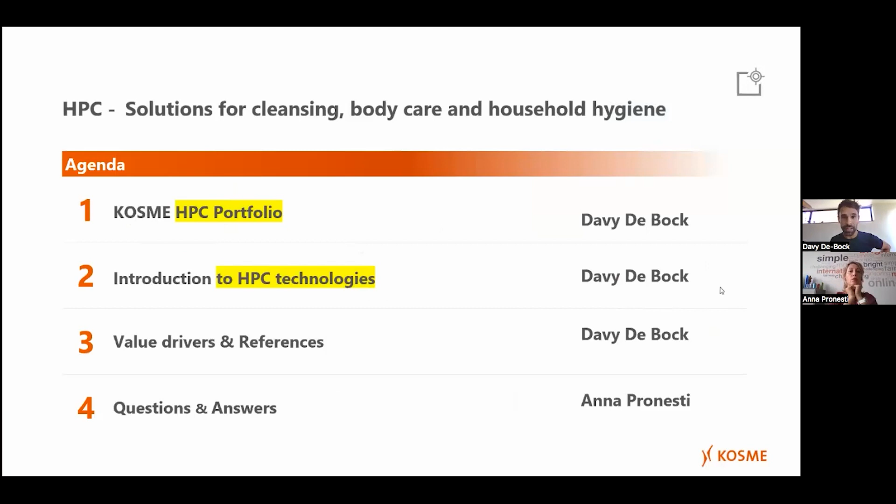So, solutions for cleansing, body care and household hygiene - house care and personal care, as we speak of. We from Kosme, under the Krones wings, are the specialists for low, medium speed lines when we speak about house care, personal care business markets.

From the production of fillers and labelers, over palletizers, depalletizers, blow molders, packaging machines and so on. Everything happens and is built in Germany, Austria, and the northern side of Italy.

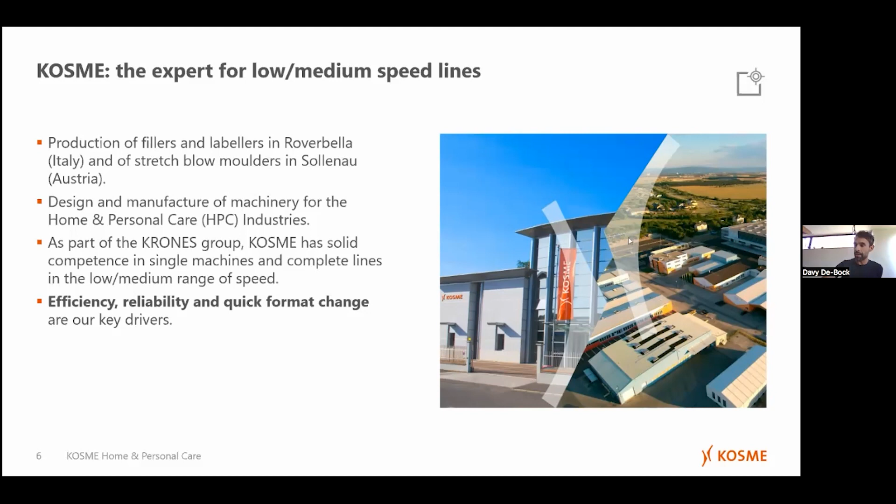As you can see here, the HQ for Kosme is in Roverbella, Italy, which is 21 kilometers away from Verona airport, where the main activities of labeling, filling and packaging happen. Then there's our other facility in Sollenau, not far from Vienna, Austria, where everything in terms of blow molding happens.

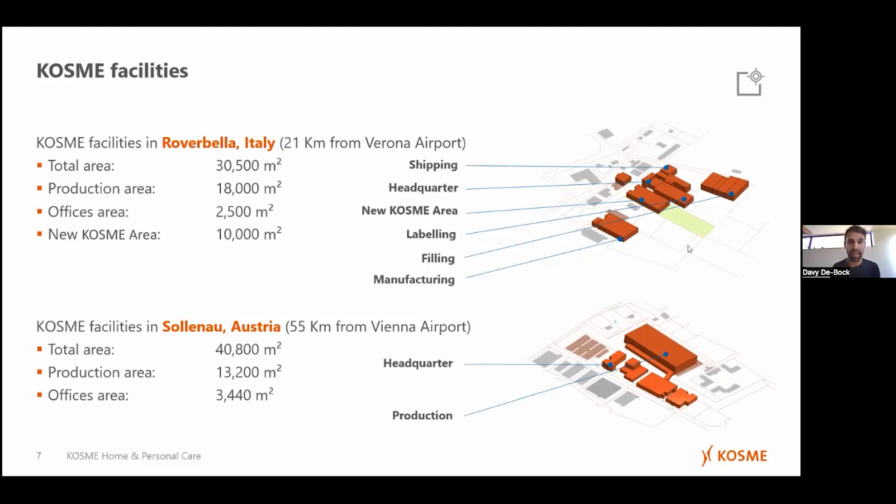The mother company Krones, on their side in Regensburg, is covering all the same technologies, but based in Germany, starting from a higher speed, starting from 20,000 bottles an hour.

When we speak about Kosme in the medium-low speed range, we're speaking about speed ranges starting from 2,500 bottles an hour up until 20,000 bottles an hour, more or less.

We're speaking about single machines or complete lines. Those single machines or complete lines are designed with an eye on flexibility, with an eye on different kinds of shapes of bottles, products, and with a high quality output.

No matter the shape, the cap, the label, or the product inside, as you can see on the screen with all the different examples.

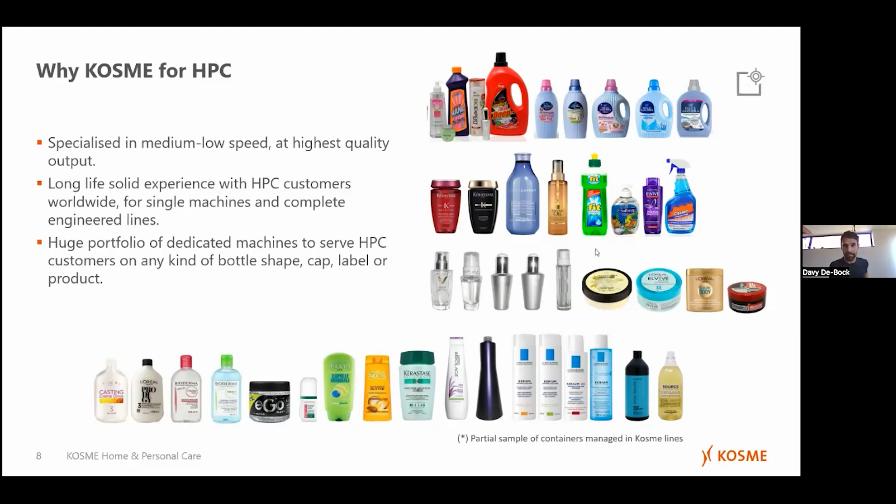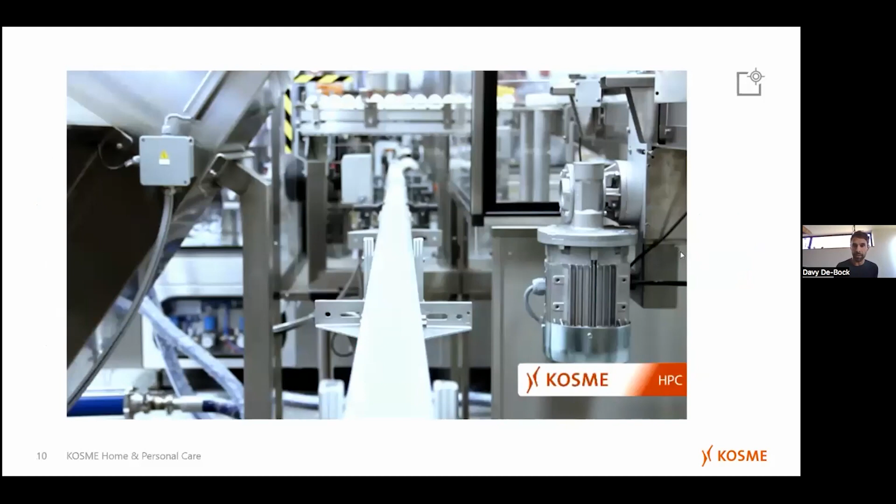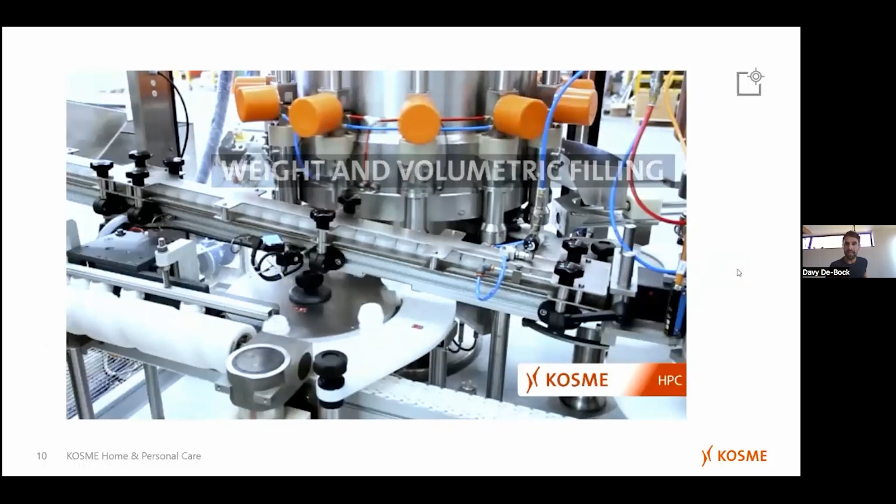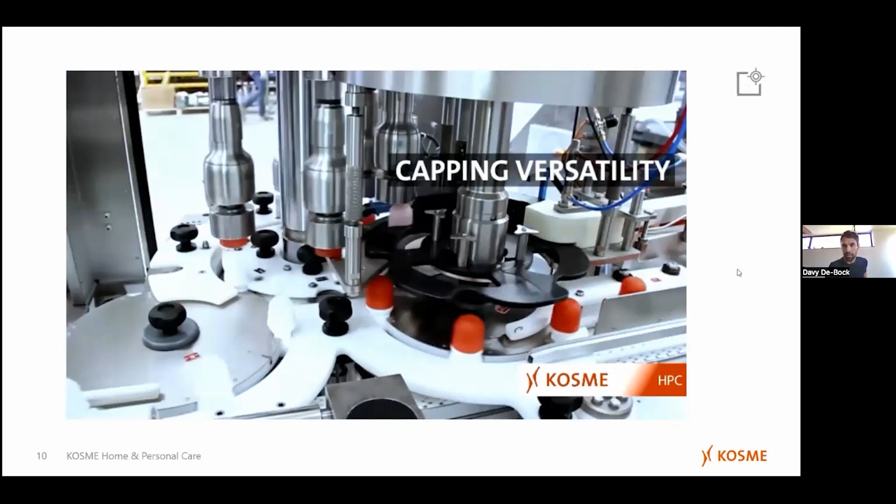We're going into a video first to quickly show you what we are capable of doing and what we're speaking about. So as you can see right now, we're speaking about a filler which is filling a quite common bottle, a deo bottle with a roll-on stick. It's a quite common thing, but it's not so easy to apply.

We're seeing the dispenser pump capping, which is quite common in the house care, personal care world, but not that easy to apply as well. Regular push-on caps, twist-off caps, all different sizes of caps.

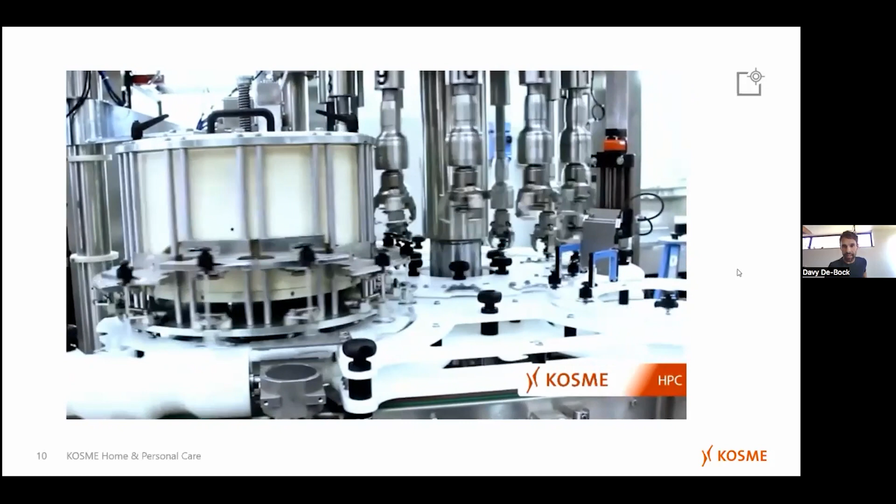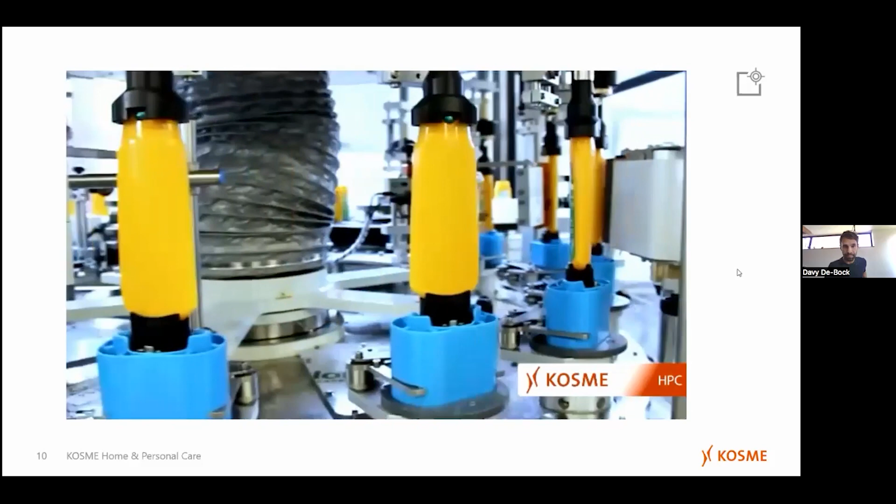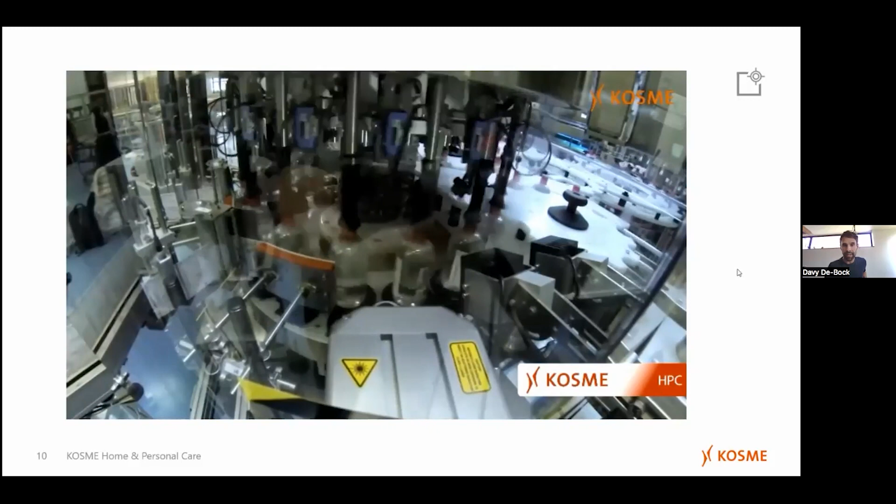Same goes for labeling. We're seeing an easy top-on labeling as well as a front and back self-adhesive label application, with orientation of gripping the bottle into the correct position before and after labeling, tandem labeling, quality control during the labeling, and complete block solutions.

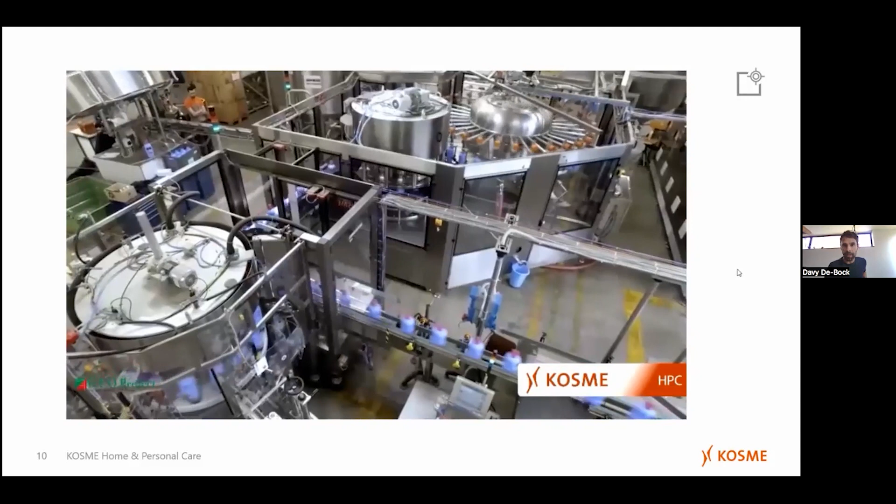And just showing off how fast those things go and how they look from a top view, which is always quite interesting to see.

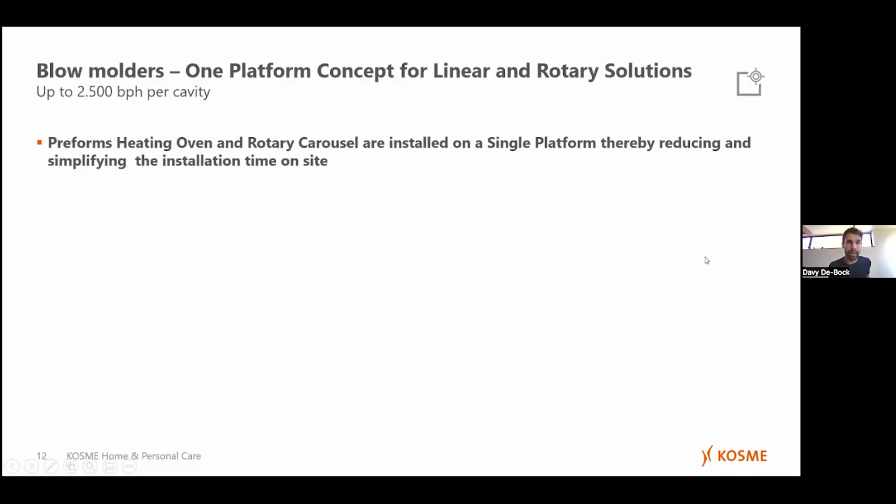If we go deep into the machine portfolio, starting with the blow molders, you can take as baseline that each cavity of every machine is capable of running up to 2,500 bottles per cavity. We have solutions for linear machines for big bottles, up to 30 liters, or really small bottles down to 0.05 liters. Everything depends on the size of the bottle and the output speed you want to achieve.

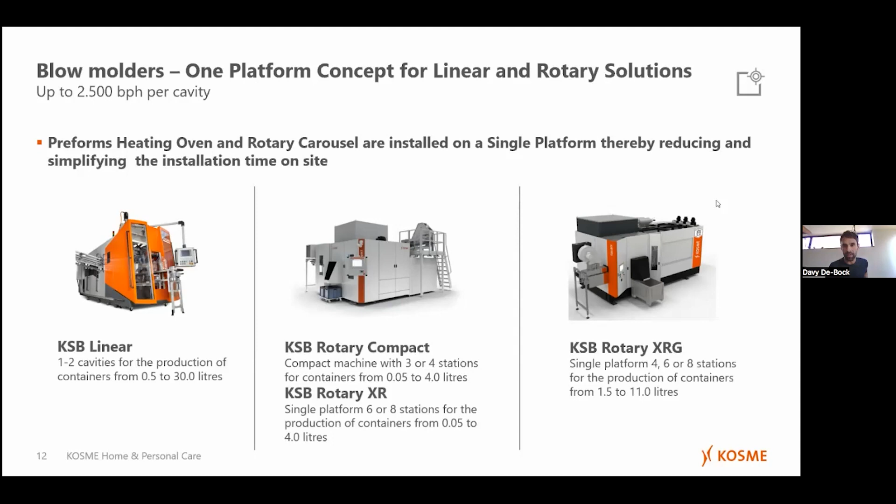If you want low speed with bigger bottles, it's most appropriate to go for inline blow molding, linear machines. Where you want high speeds with volumes up to 4 liters or 11 liters, it makes sense to go for rotary machines. Rotary machines can be in compact executions, or with preferential heating. So in terms of novelties, everything is possible to implement.

As I just mentioned, preferential heating is quite important, especially in the house care and personal care market, other than the beverage market where we speak about cylindrical bottles. In house care and personal care, as you can see in the images, the bottles are quite atypically shaped, which requires a specific type of heating and a specific way of handling the preform before blowing it.

With our preferential heating installed in our blow molding machines, we have the possibility to blow and achieve the quality output which is requested by the customer. So you could say the sky is almost the limit.

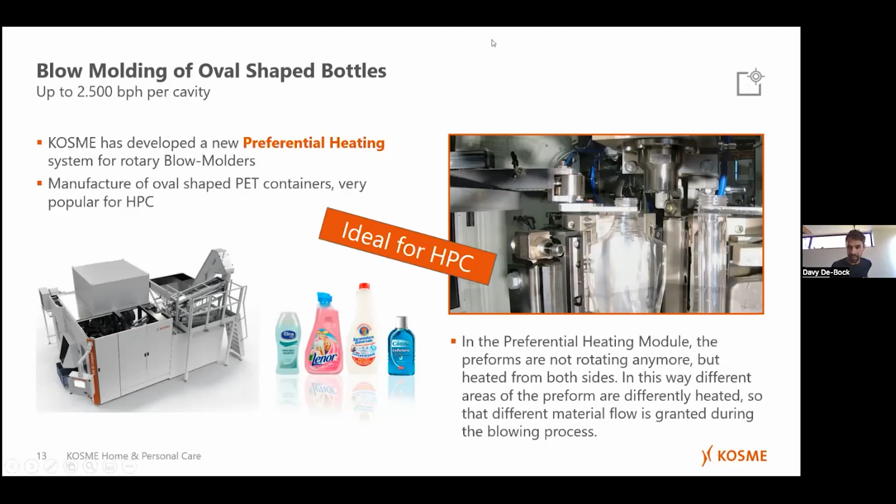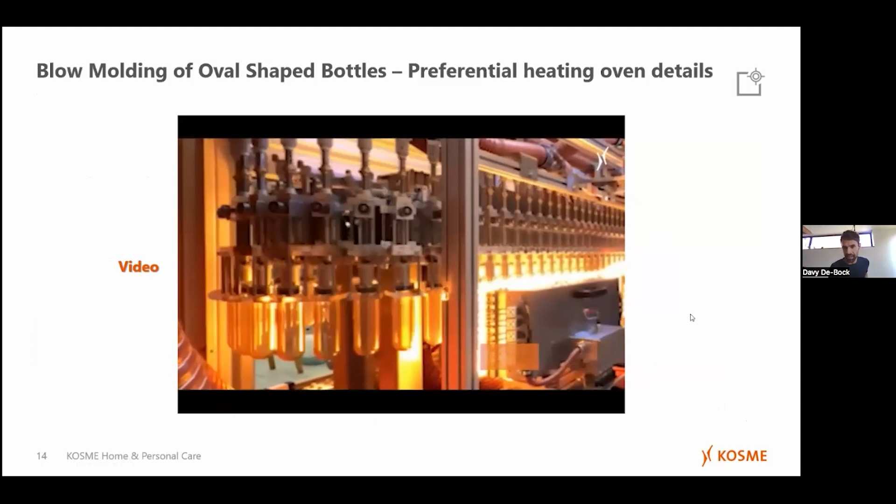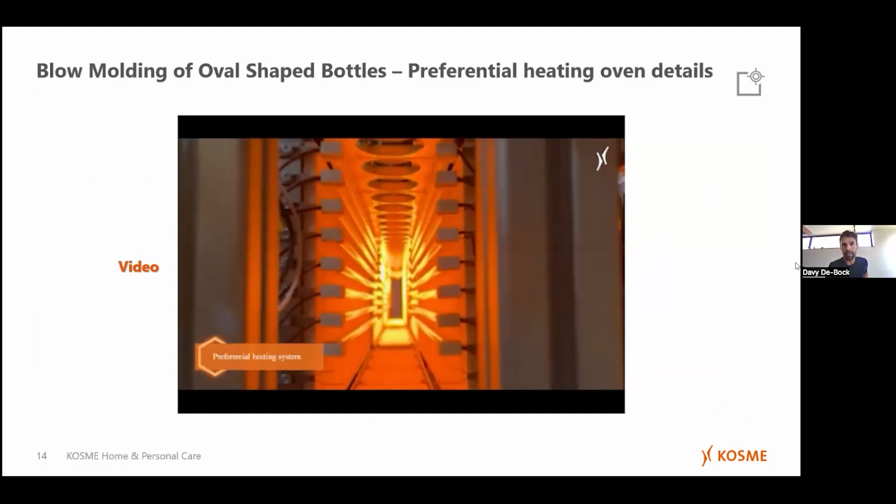Here's another video to explain some things. You can see the preforms going into the oven, where they're heated on different sections. When you see the lines there, here we go, we can decide whether we heat it more or less on a certain area of the preform before it goes out into the mold to be blown.

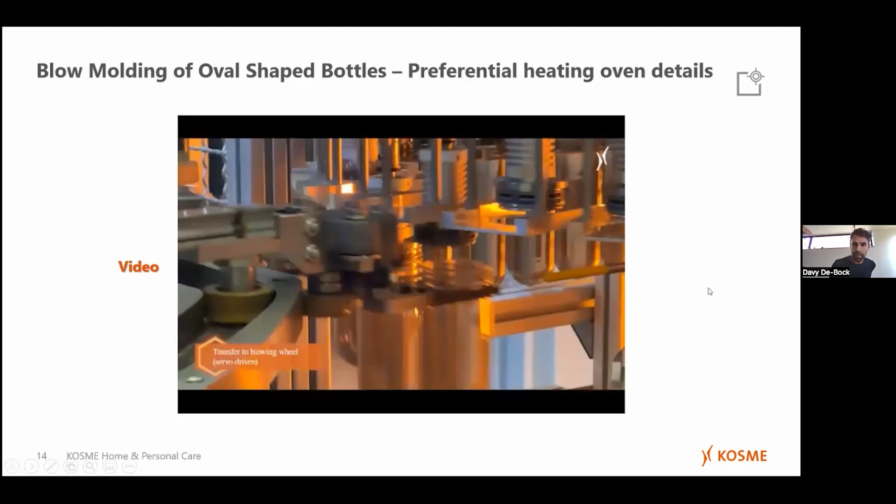When the preforms are blown, by the way, due to air recovery, we're reducing the consumption of air. So with non-stop production of blowing bottles, we're always recovering the air that escapes while a preform is blown to use it for blowing the next preform, which is a big advantage in terms of consumption data.

When we go from blow molding into filling, when we speak about house care and personal care, we're most often speaking about weight fill or volume fill.

Weight fill is the most ideal, or most covering, solution in terms of filling, as you can fill both very viscous products or very foamy products due to the pressure you can put on the tank before going in. Which is really important, and a big advantage of weight fill is that you have the combination of both products you can handle.

On the other hand, you have a high precision, a really high precision in terms of filling your product, which means no spilling of product left or right, and an exact output of what's going in and what's going out in the final bottle. There's also the possibility of two-stage filling with fine and gross flow, which gives you perfect control.

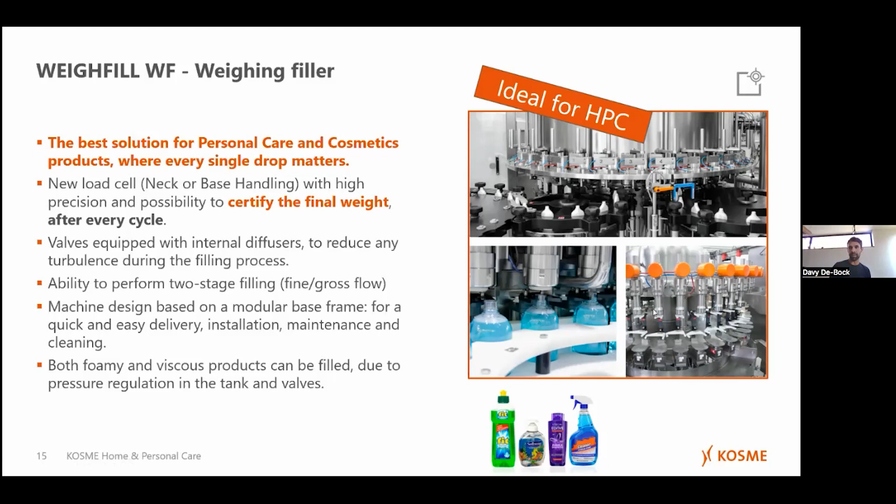After every cycle, by the way, every load cell indicates the exact output on the screen, so you have perfect control. You could say Big Brother is watching the complete machine and every bottle that's coming in and going out.

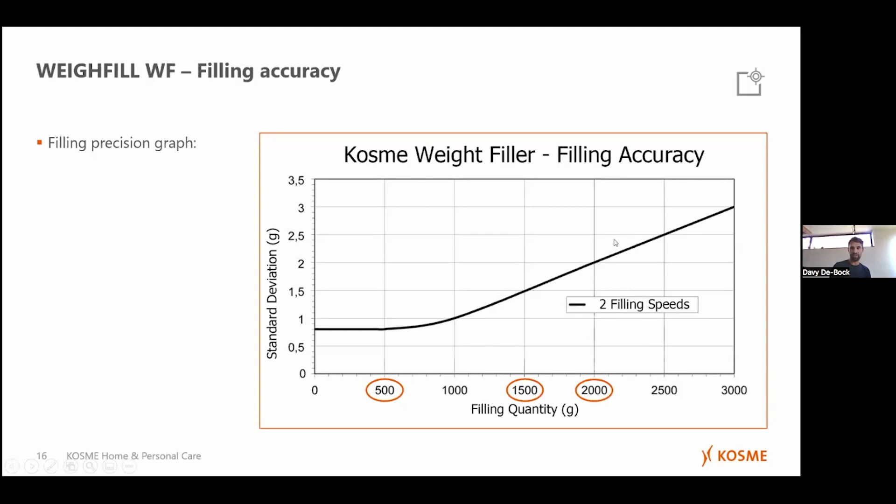As I mentioned, for filling accuracy, on 1 kilo of product, so 1,000 grams, there's a standard deviation of 1 gram, which gives pretty impressive numbers to work around. And keep in mind, this is theory. When we're doing our filling tests in our lab in Italy, we're even achieving better results. Just for your information.

Another big advantage that we came up with a couple of years ago, based on our experience in the market, is the low-flow cleaning inside the tank, as you can see here. Often you have a lot of issues cleaning products, as they're always on an oily base and very viscous in the tank. With these spray balls, you get 360-degree coverage for machine cleaning, which reduces it to a pretty simple job and a perfectly 100% controlled job, which is a really big advantage, especially when you're changing formats or products on a regular basis.

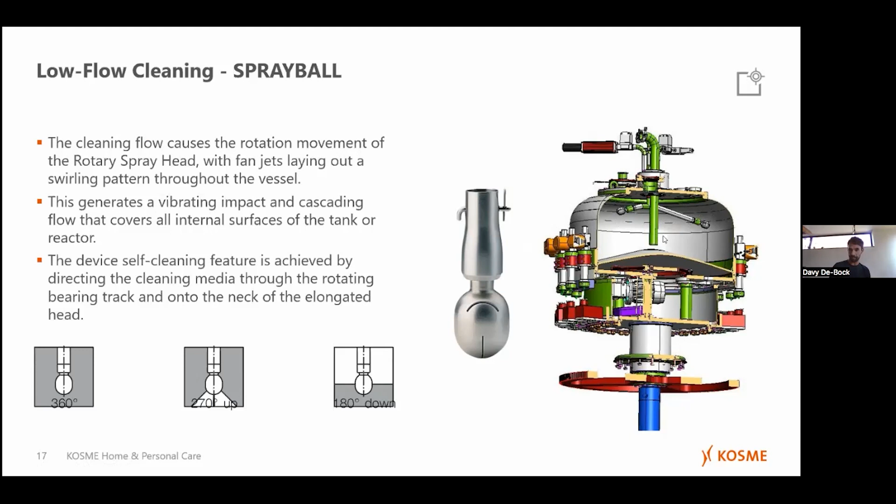The other filling technology I spoke about was volume filling. Volume filling is limited up to 30,000 bottles an hour, which is quite high for the house care and personal care market we're speaking about. This is just to give you an indication of the combination of valves on a carousel diameter we can offer.

The most important thing about this volume fill is that we're working without a tank. So it's a tankless solution, which makes it very easy to clean. A small disadvantage of this volume fill is that it's more difficult to work with viscous products, although we have mass flow meters to push the low conductivity products outside.

It's not the preferred solution when there's a wide range of products you want to fill. Filling precision is also pretty high, as we'll see in the next slide. Another strong point is that there's no air return nor contact filling, so there are no filling pipes inside the bottle. And of course it's CIP capable—again a tankless solution with a closed CIP channel and automatic CIP cups, which makes it pretty easy and attractive to do a CIP during a format changeover for a complete line, since you don't need an operator standing next to it.

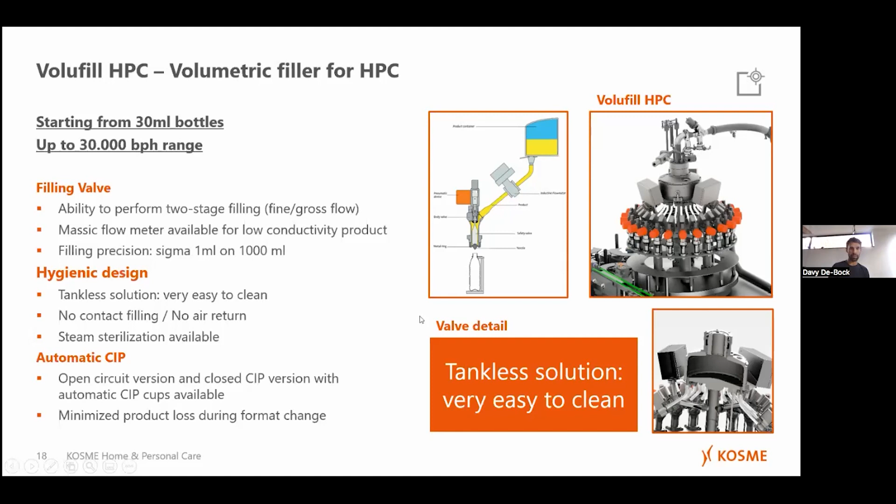Here we see the filling graph, the accuracy, where you'll see a slightly higher number than with the weight fill. So to summarize, the weight fill is the most perfect machine, both in terms of accuracy and when speaking about a wide range of products, from high viscosity to high foam. The volume fill, on the other hand, is a more simple, more basic machine, specially concentrated on more foamy products and viscosity up to a certain level. So it's all again a matter, as I mentioned at the beginning of the presentation, a matter of DNA and the exact products that the customer wants to produce and bring to market.

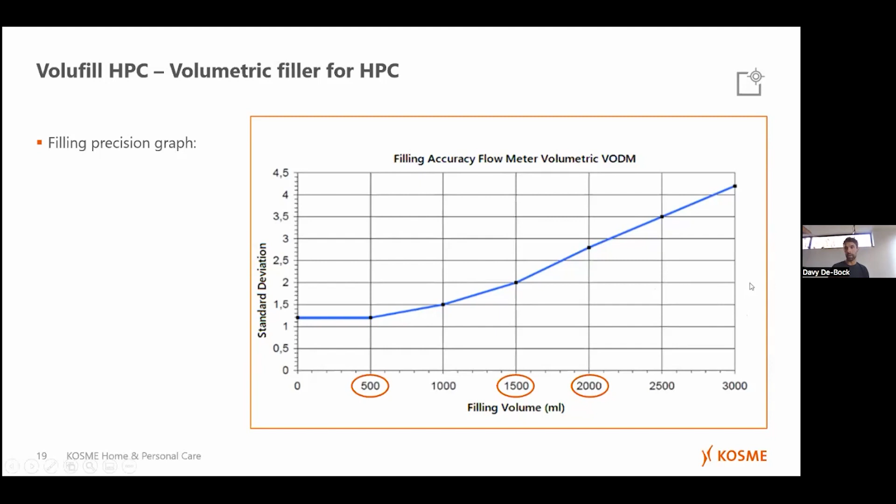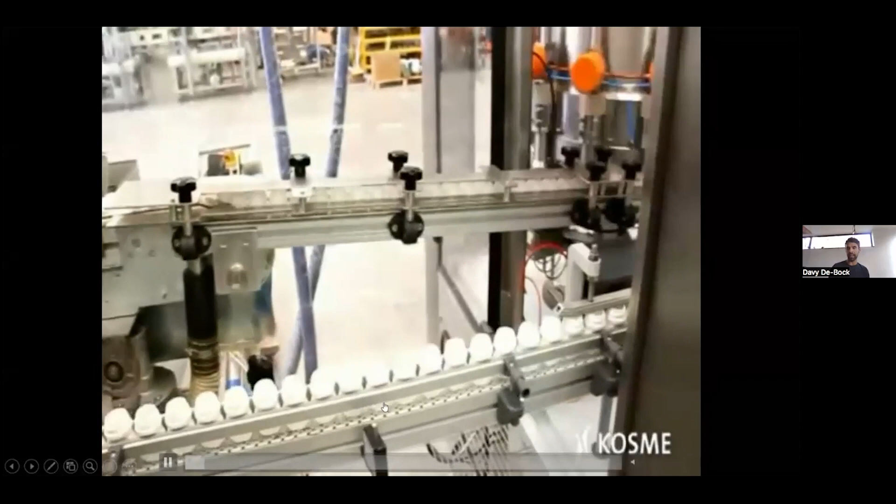This is a machine we saw in the beginning. We slide it in because, again, this looks like a pretty easy and common bottle on the market, although it's not so easy to have those bottles filled and capped, especially capped. I want to put high focus on the filling—as you can see here, there's no filling nozzle or filling valve going into the bottle.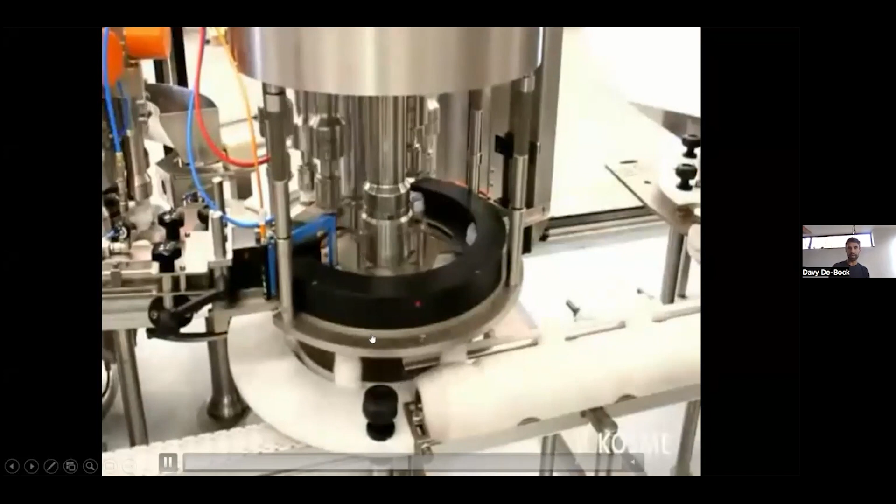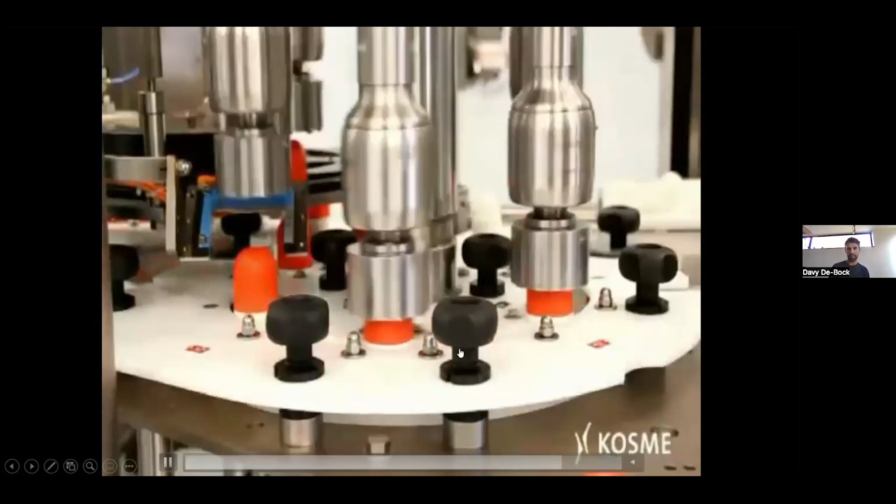And then during the capping, which is a Kosme capper—all our cappers are built in-house as well—the balls are pushed inside the bottle. All ranges are possible here, all different diameters are possible, so now we have the pre-sorter. It looks quite simple, but it's quite an impressive thing.

Another important thing when we speak about house care products is that these machines need to be capable of working with corrosive products. Depending on the solution and the product the customer wants to fill, we have the possibility to design our machines with the right covering and the right parts, and with the appropriate standards a company needs to work with—going from titanium to PVC, PP, or Halar, everything is possible. There are a lot of examples and references across the globe. It's just a matter of correctly understanding the scope of the customer and the design of our machines. That's really an important one as well.

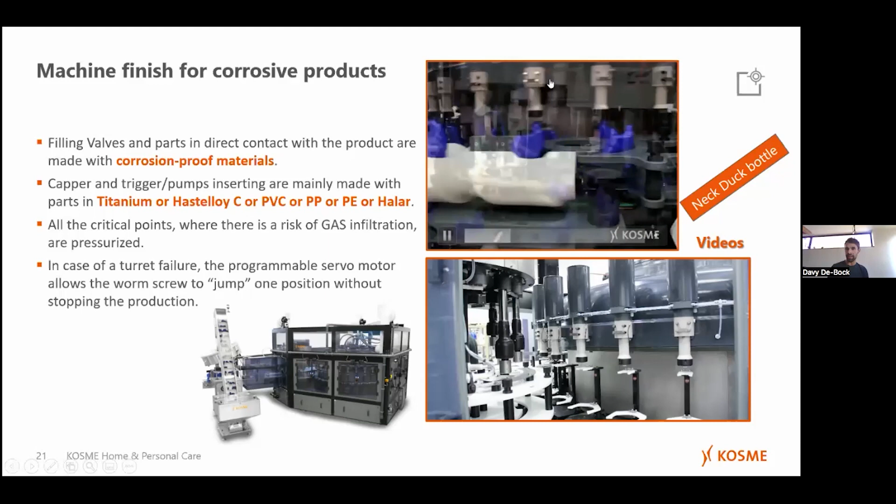But again, the biggest focus here is on how all the parts which can come in contact with the product are treated anti-corrosive, and then the bottles are tilted again to the correct position before going out. Here you can see a close-up picture of that.

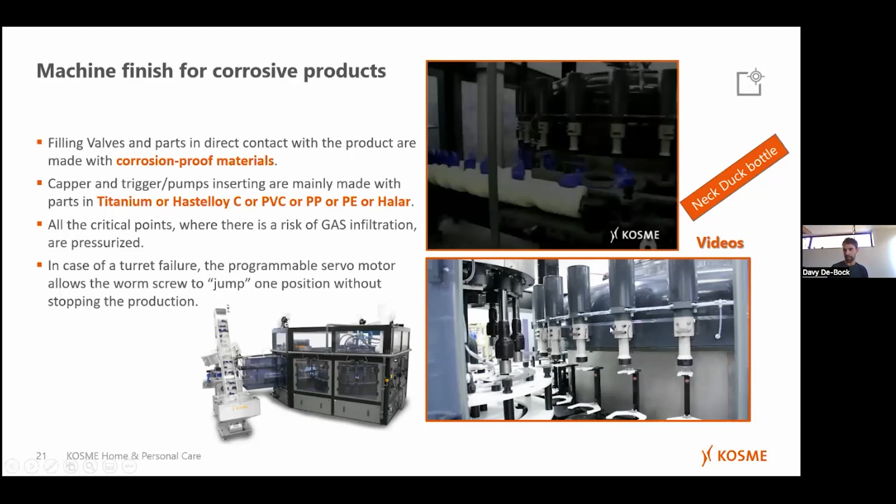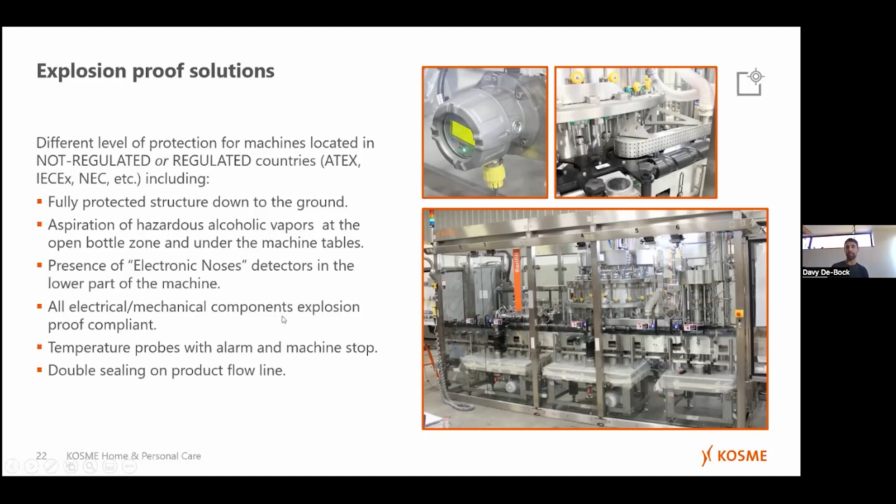When we're speaking about dangerous or aggressive products, we're also speaking about explosive situations, as with ATEX, as most people will know. Sometimes we need to fill products which are highly explosive, where there's a risk of explosion. We design our machines to respect the ATEX rules of the destination country, based on aspirating the air or vapors coming out through our connection points, electronic noses detectors installed underneath the machines, how the complete machine is based in a pressured zone, and how it's covered. The machine still looks the same, as you can see with the rinser, capper, filler here, but everything is really ATEX. It's an important aspect in the domain of house care products.

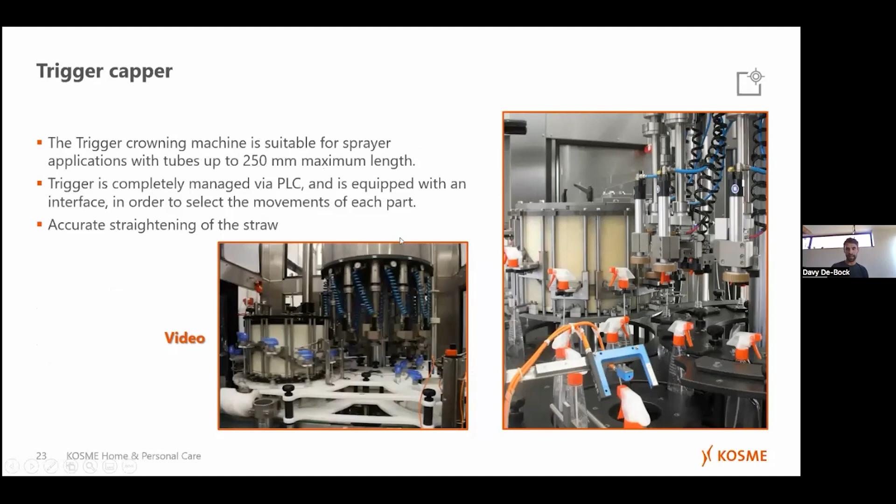Then we're going to the cappers. We saw before in the video the way of capping roll-on caps, and a little sneak peek of this trigger capper. This one is a Kosme capper we designed a couple of years ago, covering trigger cappers and pump cappers, which we see often in house care products. An important topic here is that we can handle both caps capable of rotating afterwards, or triggers that need to be oriented in one certain direction. So both ways are possible.

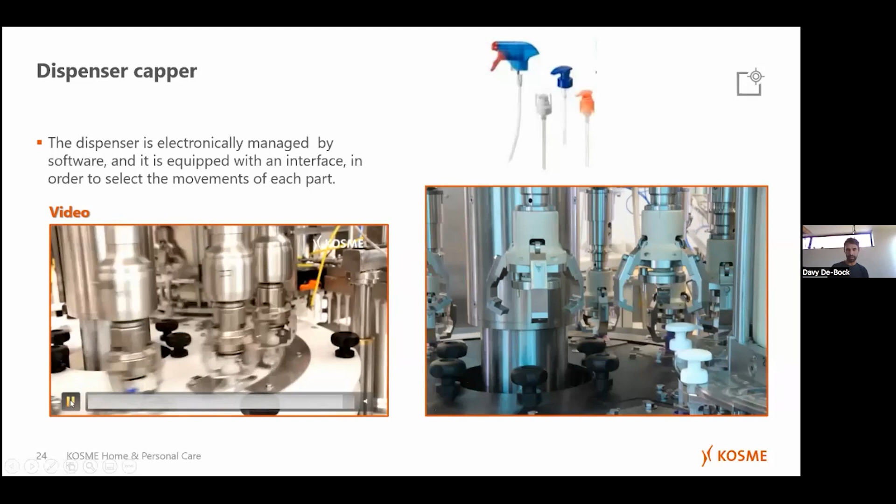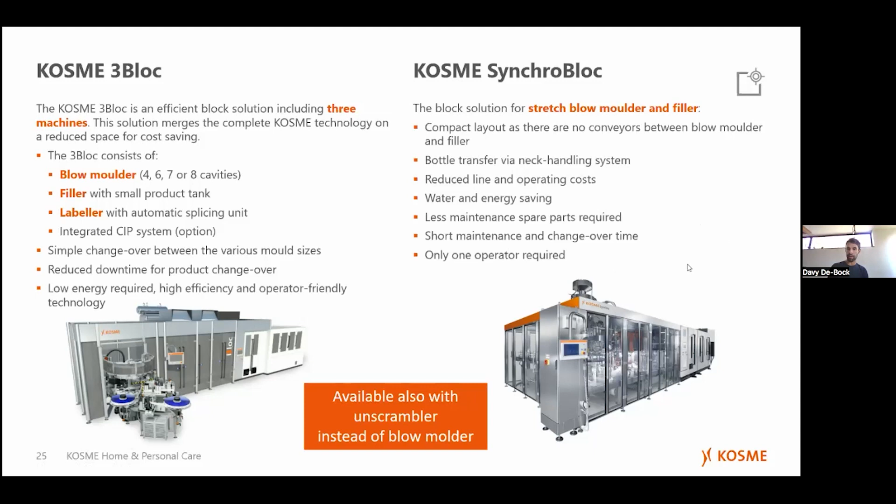On the other hand, we have the SynchroBloc, where a stretch blow molder and a filler are combined and connected to each other. Again, there's a big advantage of having the filler directly connected to the stretch blow molder. Labeling can happen afterwards. There's also the possibility to connect it to the unscrambler instead of a blow molder, but it all depends on the scope of the customer.

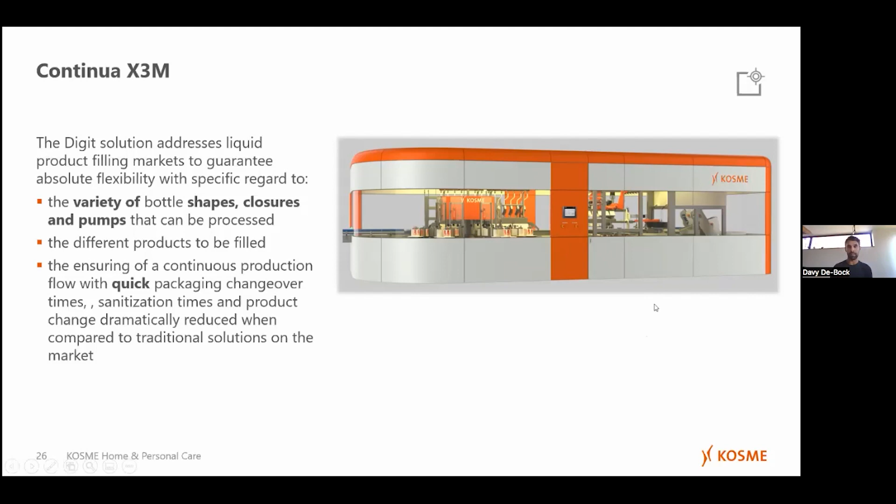And then we're going to the X3M machine. After this presentation, I will show you a small video which explains the advantage of this X3M machine. The point is that we created a concept where we want to fill, cap, and label any type of bottle, any type of product, any type of cap without stopping the machine. That's really the idea - a non-stop running solution, at a maximum speed of 6,000 bottles an hour. One advantage is no downtime anymore, and the other big advantage is a reduced floor space.

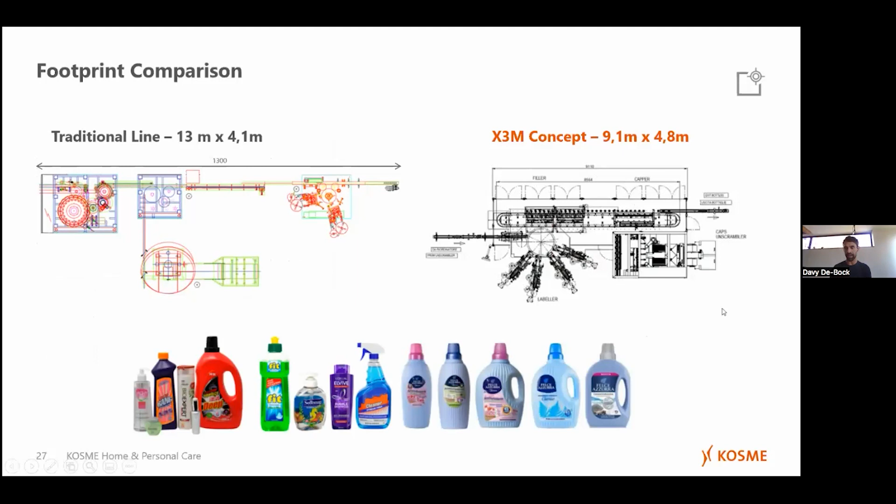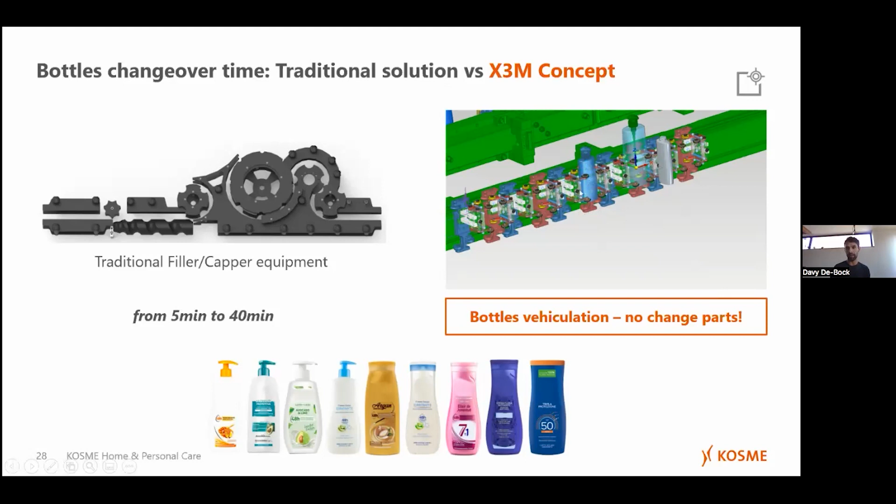We're coming close to the video at the end of the presentation, and then I'll go into detail about how it looks. Some important features: changeover time will be reduced or will even disappear, as we're working with dedicated grippers through linear B&R motors instead of the classical setup. The same goes for the cappers, where we're working with different capping heads to handle all types of caps, as you can see here.

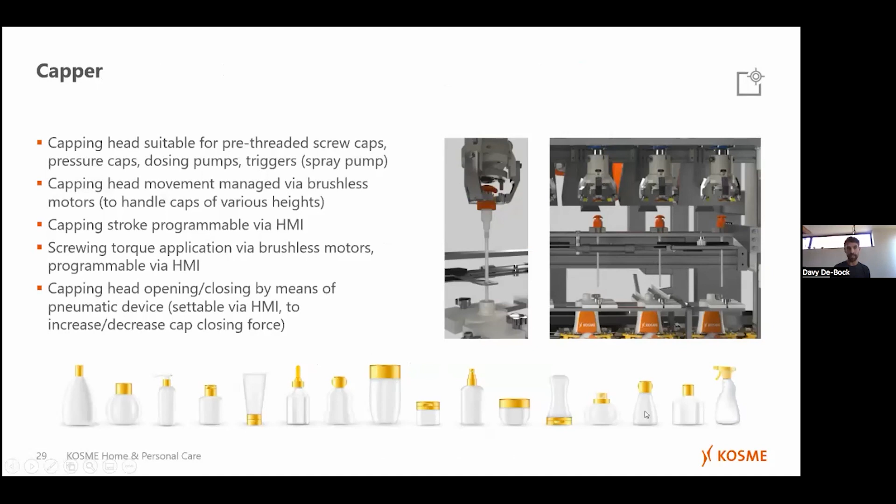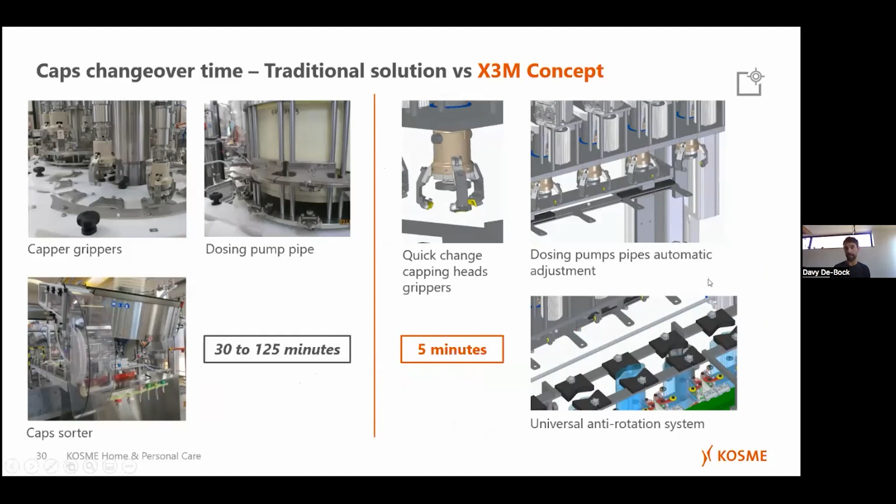And where there was a changeover time from 30 to 125 minutes, we're now reducing it to 5 minutes or even 0 if we're staying in the same range of rotating caps. And then we're going with the double cap elevator lift system in order to run non-stop without changing the caps, without having the need to run dry, let's say, and then a cap elevator.

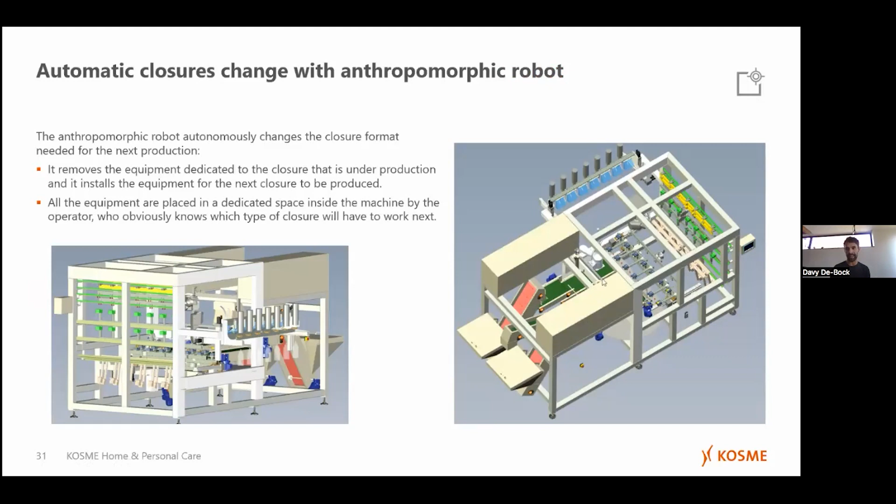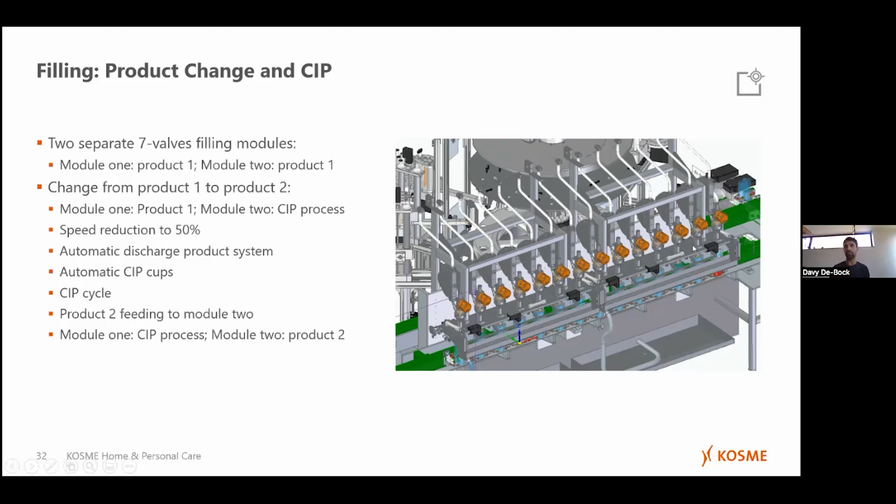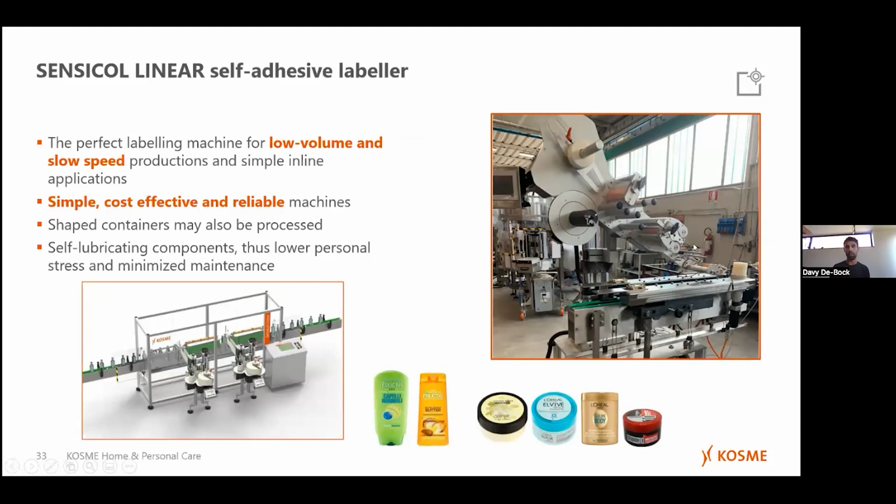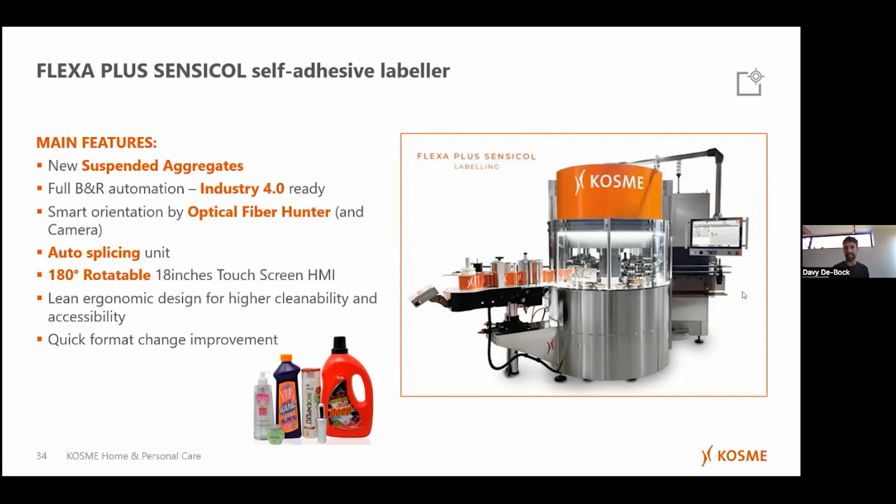Then we're going to the labeling, quite common and quite known technology. Whether we do the self-adhesive labeling on top, on the side, or in a rotating way, everything is really possible here as well, again with speeds up to 20,000 bottles an hour. After that, we're going through our mother company, Krones, which is capable of handling labels at much higher speed. Important here is to understand that we're having the non-stop solutions, the orientation, the quality controls, and the easily accessible machines always as a baseline, let's say, of our machine designs.

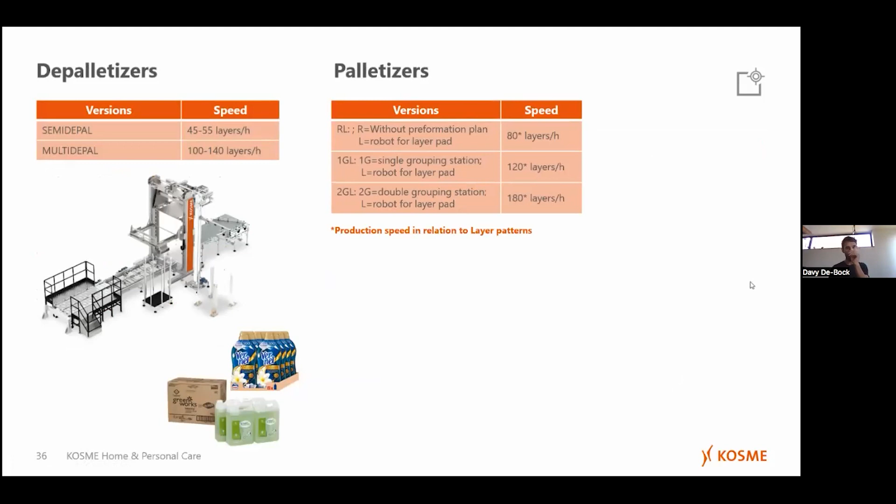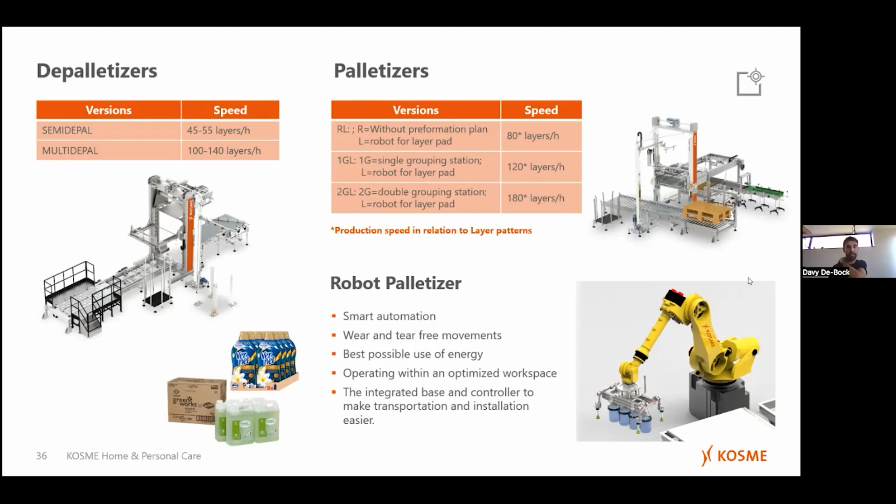I'm going a little bit faster here as we're running a little bit behind time. Again, we're having the depalletizers and the palletizers as well, both with robot palletizing, whether it's needed or not. Everything is dependent on the speed, the floor space we have available, and the type of packs we need to palletize or depalletize. And then we're going to the engineering and the line competence.

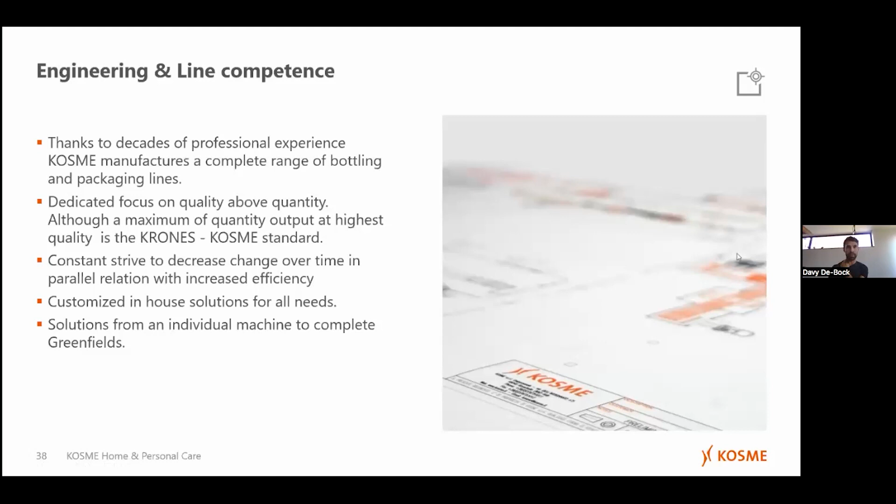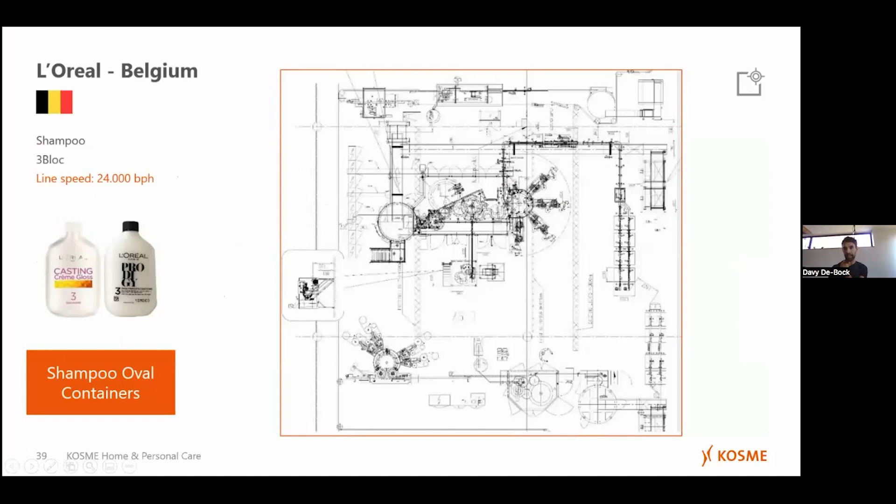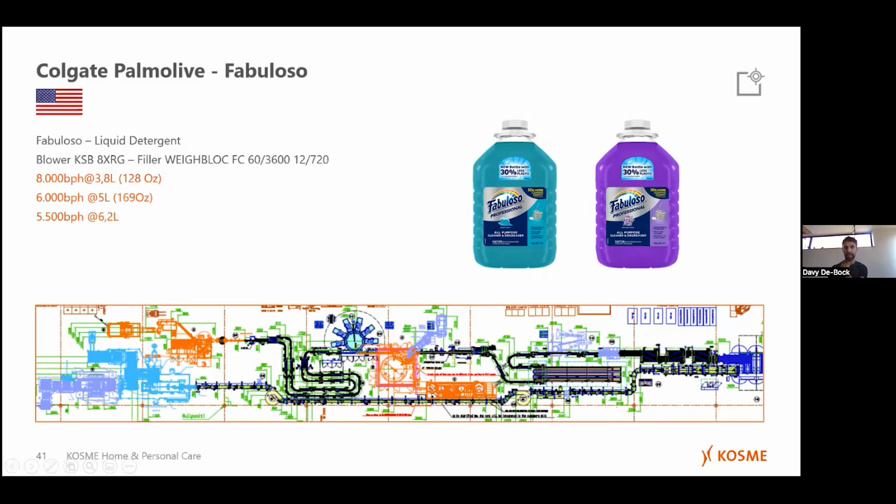As I mentioned to you before, we're doing the single machines or the complete lines. As you can see here, an example where we're having a synchro block with the filling and the capping and the labeling in one block design for a pretty small bottle, which was quite challenging. We could do the bigger lines as well for the bigger blocks when we're speaking about 5 liter, 6.2 liter bottles, complete lines where we have the blowing, filling, labeling. This was a project in the United States.

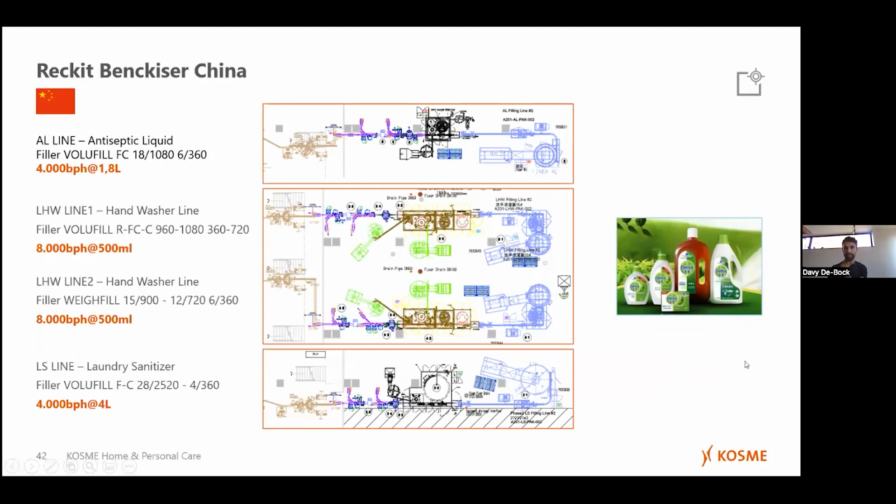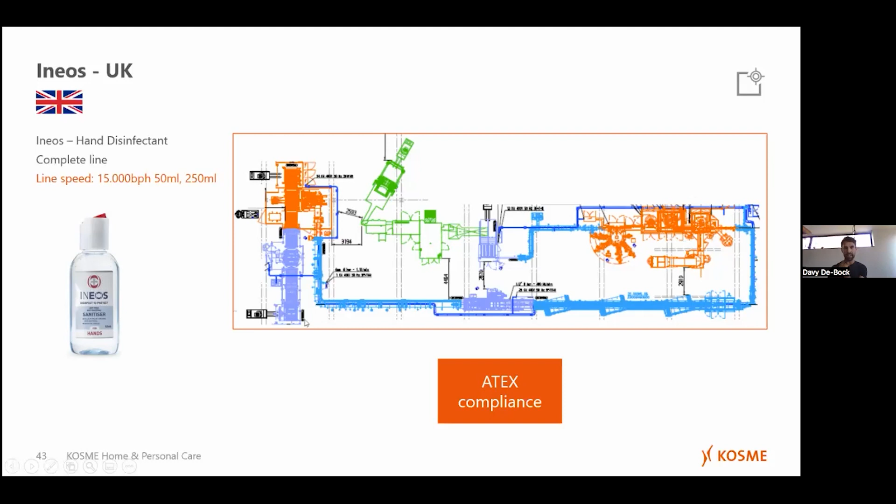Another recent project we did for Reckitt Benckiser in China, where we had lines for laundry sanitizer, hand wash, so both weight fill and volume fill, 8,000 bottles an hour, 4,000 bottles an hour. Again, for Ineos in the UK, a line speed of 15,000 bottles an hour, where we worked with a labeler connected to filler-cappers, completely ATEX, so the explosion-proof solution, for a hand sanitizer, COVID, if it rings a bell.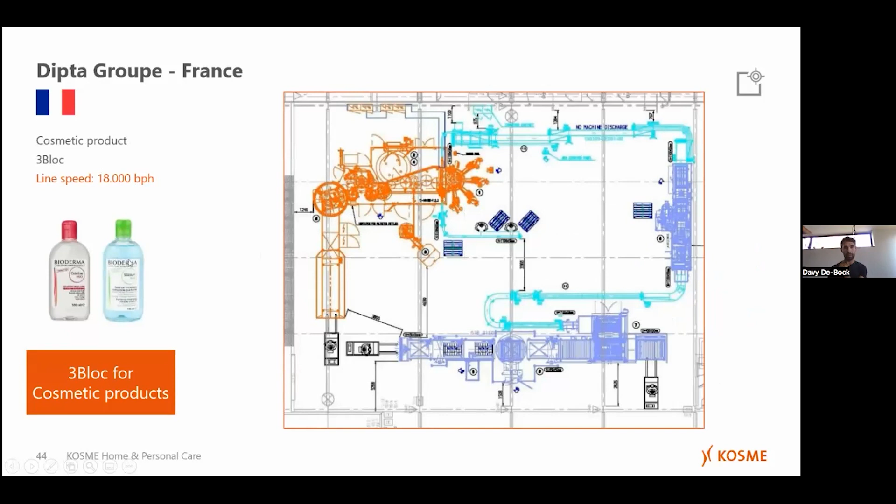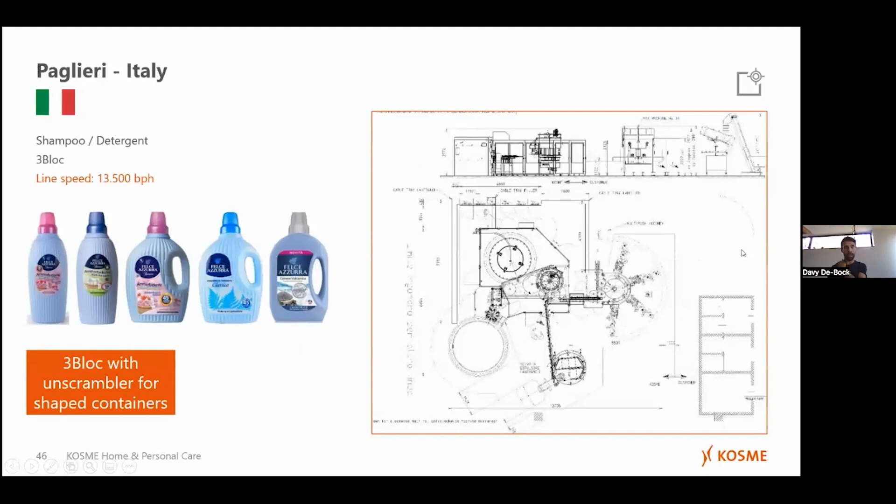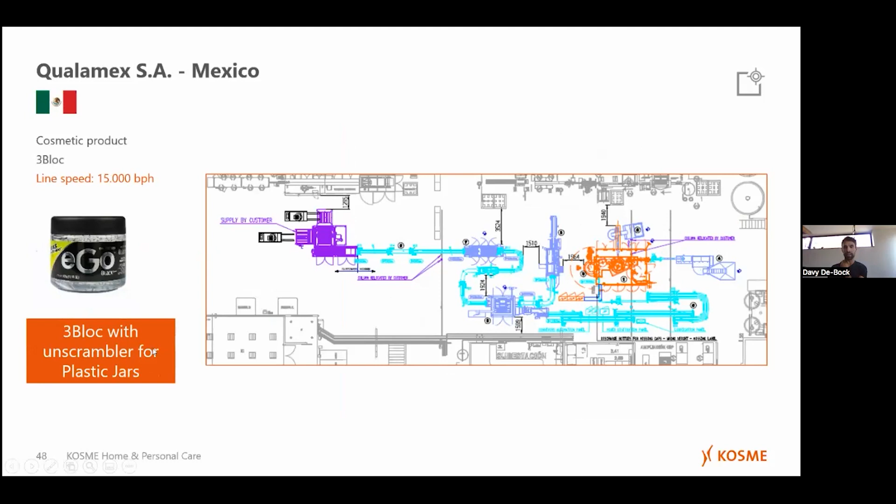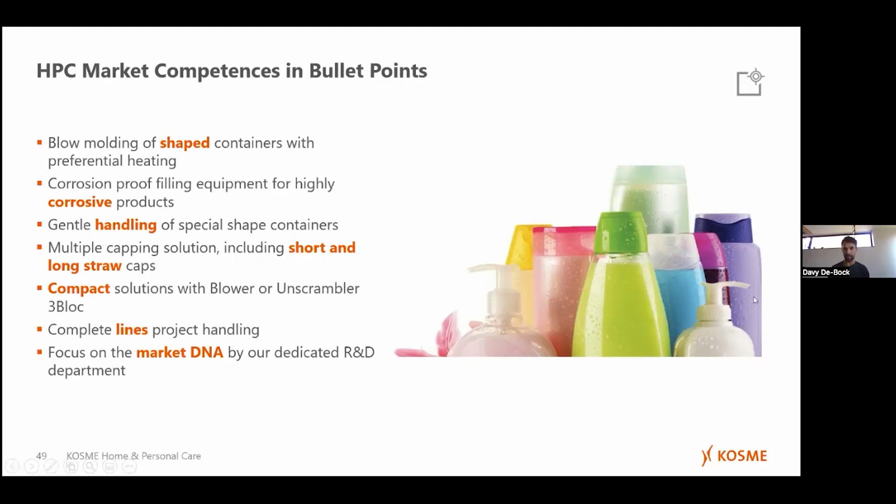Again, the competences in bullet points. So the blow molding of shaped containers is a possibility, is known to us, and is one of our strong points. Same goes for corrosive products, aggressive products, whatsoever. Handling all different types of caps and the compact solutions, complete lines or single machines. Everything is possible from the Kosme portfolio, as I've shown you before.

I think we're having the Q&A right now, Anna, and then I'll get back to the video of the X3 machine. Is that okay?

Yes, sure, absolutely. I was waiting for you to give me the go. Okay, so due to time reasons, we will try to go through as many questions as time allows. Now I'm looking in the chat. Just a second, I see things coming up. And here we are with the first one.

Okay, Davy, starting from which speed does it make more sense to choose rotary labelers instead of linear ones? Very good question. There's no exact border, no exact guideline where you can say, starting from this speed, you need to go to rotary or to inline linear labeling. There is like an invisible rule that says everything above 6,000 bottles an hour is highly recommended to go for rotary labeling, because with linear labeling you don't have control of your bottle.

To everyone, I want to highlight: if you go to YouTube and type X3M, Extreme Kosme, you will find a video on the Kosme YouTube channel where you can see a complete simulation of the X3 machine, which was shown during the last Interpack in Düsseldorf a couple of months ago. It shows exactly what the machine is capable of doing.